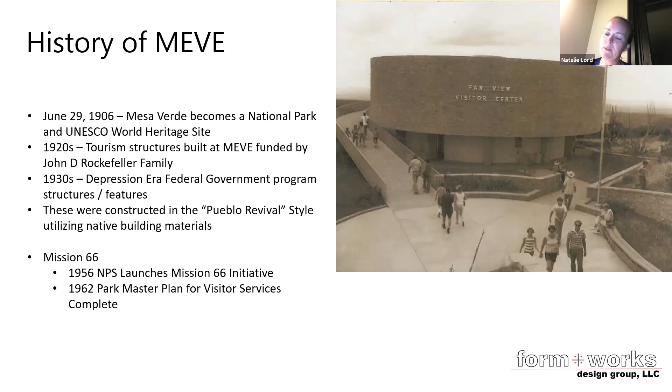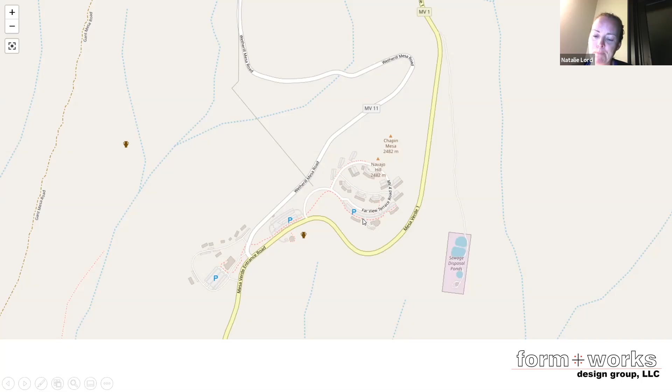So for any of you who've been down there more recently, they just built a brand new visitor center right by the front gate. But in Mission 66, they were expecting a huge amount of people to come to the parks. So they really wanted to disperse the population a little bit more. So that was the decision in putting the visitor center so far into the park. So the visitor center was designed to be closely associated with the Farview Lodge. There's a connection under the road.

Let me get to this little... It's just playing on its own.

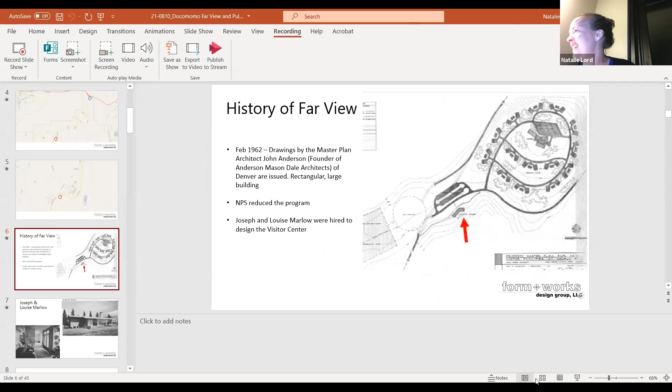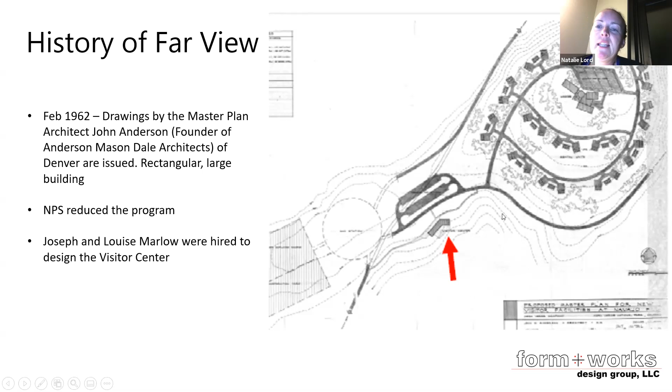So in 1962, the drawings for the master plan were originally done by John Anderson. He was the original founder of Anderson Mason Dale out of Denver. You can see that he has a large rectangular plan. And then basically the park scratched that completely and went with a plan by Joseph and Louise Marlow. The Marlows were a husband and wife team best known for their modern single-family homes in the Hilltop neighborhood.

So the Marlows worked on a design in 1962 and 63. During the design period, there was debate over what would be the use inside the building. So you can see the unique Kiva style was really what inspired the shape of the building and the experience around the site of approach. Even during construction, changes inside the building happened. They decided to scrap the idea of having an auditorium and instead have more display cases and a museum exhibit.

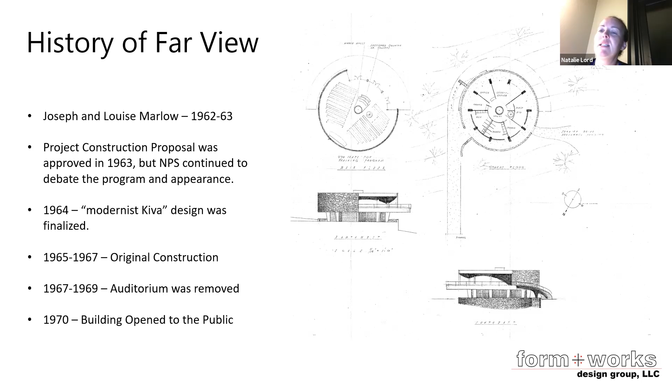So what's interesting about this is that they determined the period of significance was from 1964 to 1968, which was prior to the building even being open, but it did span this design change process that happened. So here are some of the drawings from that redesign. You can see the original larger auditorium was scrapped for a smaller one on the left. And then here's the current plan.

So the historic plan was really grainy, but this is our HSR plan that shows you can see that basically the original design is still there, which is great.

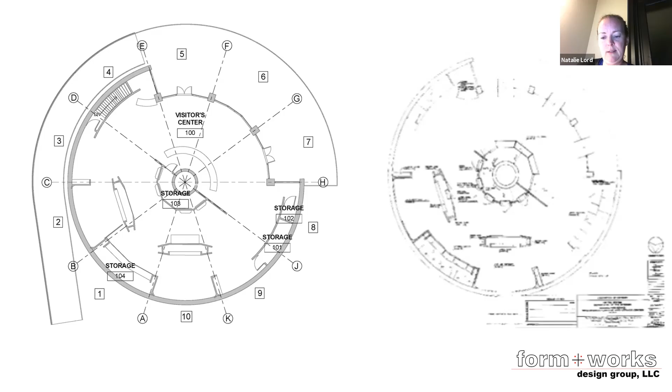So again, this was kind of a joint effort between the Park Service and History Colorado. The difference between an HSR and an HSA is they're pretty similar. It really focuses on the existing conditions. What sort of deterioration are we looking at? Cataloging the existing conditions and what changes have happened over time, which I'll get into shortly.

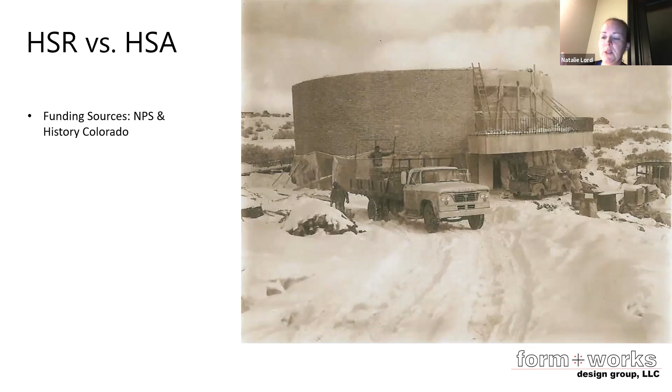We had some great historic photos during construction to work off of, and we also were able to work closely with museum staff that had a lot of records of what had been changed through time. So, obviously, the character defining features of the building included site context, including that historic approach kind of around on the ramp, the building form, the original materials, and the interior form and layout.

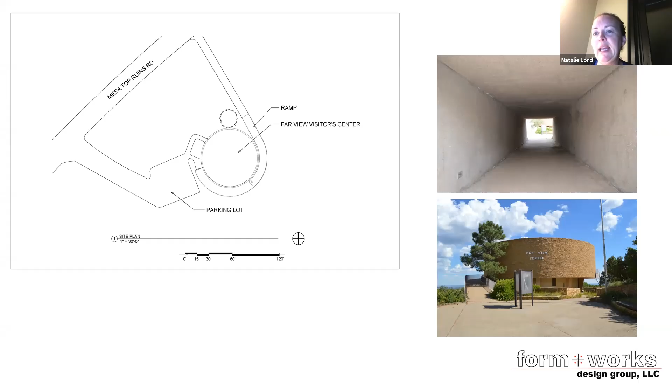So, I mentioned that you came across the site kind of under the highway through this tunnel that you can see on the upper right. And then you came out into this nice open plaza and came up the ramp and around the building. So our viewing platform is still intact, and you'll see some photos shortly that'll have some of the subtle changes that happened over time. The first floor is really interesting.

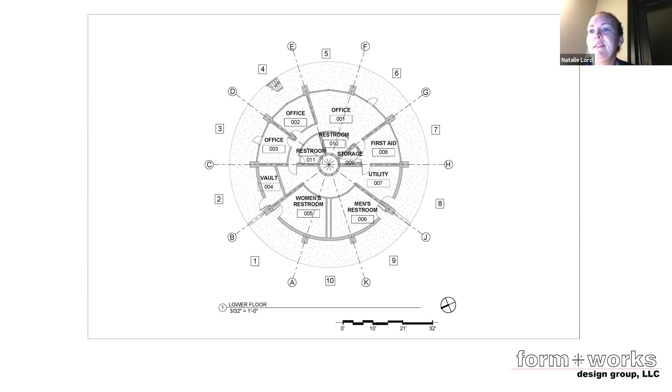It was a utilitarian use for offices, utility space, and the building is really supported by this central round column, and it cantilevers out from that. It's a reinforced concrete structure and is really unique, I think. They use that center open space to run mechanical up through the building, and then also do some really very cool beam cantilevers, which you'll see.

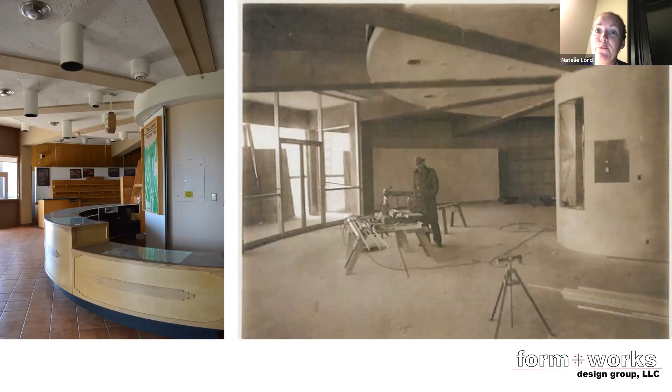Original materials at the lower level include great glazed brick, concrete floors, and original interior doors with transoms. Rehabilitation of these materials is recommended to accommodate a new use, but we decided this wasn't really a critical piece. You can see kind of the comparison of the historic photo and a current photo, that a lot of those original key features are there. I think one of the major losses, which you'll see momentarily, is that great historic storefront, which did get changed out in the 1960s.

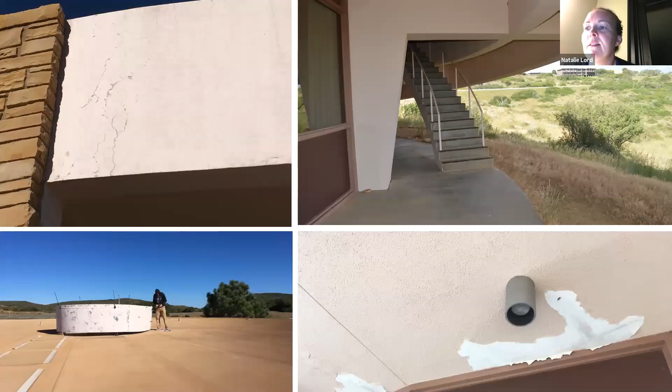So here's another close up showing that ramp from below. Really minor deterioration considering the age of this building. And then some of those penetrations that happen just with mechanical units and whatnot. You can see the chain link a little bit better. So I think one of the other elegant pieces of the building is really this lower staircase that spins around. You've got the great, you know, curving ramp, but you also have this staircase that comes down from above to the lower level.

Okay, the Pulliam Community Building is located on Cleveland Avenue, just to the south of the historic downtown. The building was basically a WPA era Works Progress Administration project, which, as many of you know, was funded through Roosevelt's campaign to get Americans back to work during the 30s. But the other part of that was that it was funded by Lillian and D.T. Pulliam. So they offered $20,000 as seed money.

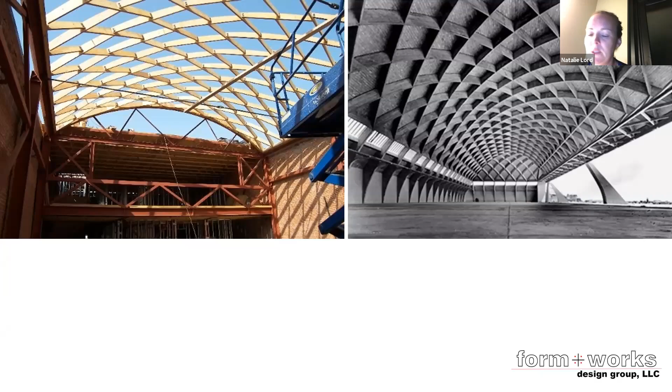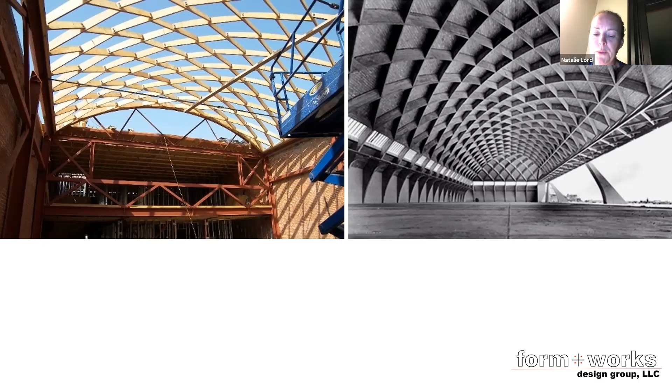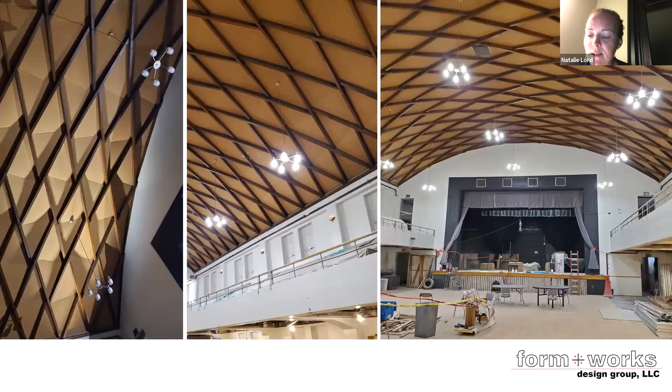At the Pulliam, a wooden sheathing covers the structure on the outside, and the lamella truss was originally patented in 1921 and became popular between the world wars, especially in Germany when metal for construction was in very short supply. So these roofs are very inexpensive, they're easy to build, and obviously very elegant. The standard wood segments are very short, making them easily mass produced, and there's no need for kind of an extensive scaffolding to construct them. You can build the pieces and sort of start spanning across the room.

So here's some current photos of the Pulliam roof. For those of you who are less familiar with the WPA, again, mentioning those simple materials, this is actually covered in just a very simple kind of a composite fiberboard. And fortunately for the Pulliam, none of this was ever painted, so we don't have to worry about stripping it. The walls are solid concrete, but in the recesses around the windows is the fiberboard. So that did get painted, but fortunately the roof did not.

Just as an anecdote, when I was in architecture school out in San Diego, our studio building had a lamella truss roof, and my professor said that there are actually very few of these structures left around the country because a lot of them were lost to fire or extensive loading. So we really feel like the Pulliam roof is probably, I don't know that it's the only one in Colorado, but it's probably one of very few. So if any of you come across one, please let me know.

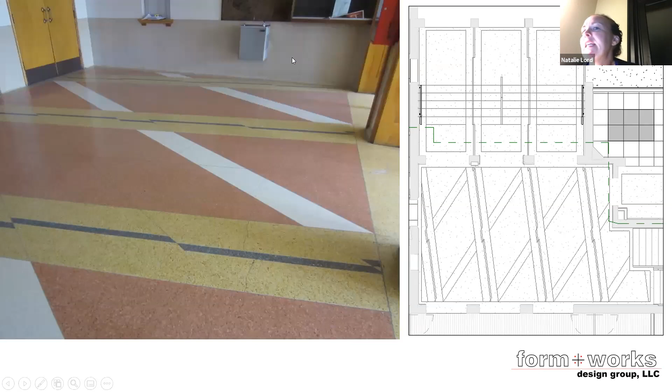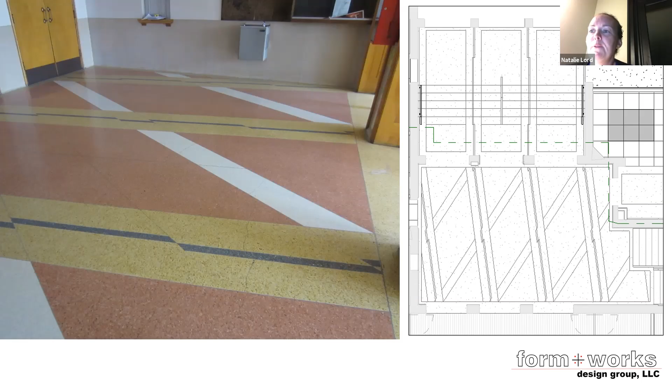So the other unique piece, again, it's a very simple building beyond some of these pieces, but the other unique piece that's very decorative is the terrazzo floors. So here's an image of the main lobby, and then I showed kind of a plan of what that actually looks like. It's kind of got this electrified look, but it also has that lamella truss pattern in the floor. So we definitely are highlighting that elsewhere.

So to talk a little bit about what's happening in the building, it's an assembly space, so A3 occupancy, a community hall, and when we did the load calculation, there was well over 1,400 occupants if it was fully loaded. And I'll talk about how we actually reduced that down, but what you're seeing up in the upper right is our current occupant load. And as you can see from this original demo plan, basically, those two egress stairs that are between column lines 9 and 10, not only were they undersized in that they were less than 36 inches, but they were very steep. They didn't comply with current codes. So trying to get 1,300 people out of the building was why the fire department basically shut it down.

While we were at it, we decided that accessibility could be done much better. So as I mentioned, there's a concrete ramp that got added onto the building, which really changes the historic facade. And the only accessible path was to this main first floor auditorium. The other kind of clunky part was this lift, which I'll show you in the main lobby.

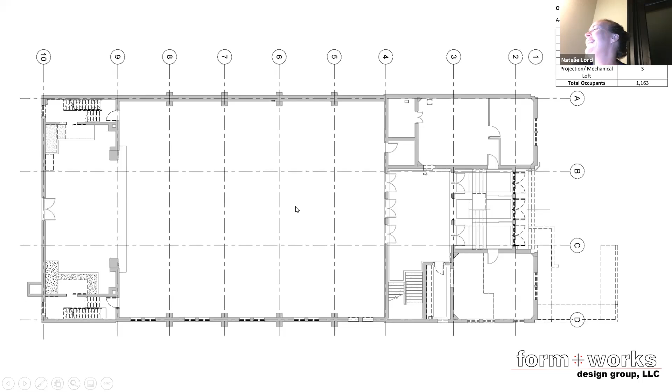The other challenge that we have with the 1936 building is that there's over 12 levels. So I tried to highlight them all. The lowest level is the boiler room, which obviously we don't need that to be accessible. But we have this lower basement level, which I'll talk about, where we're incorporating new restrooms at the basement level. And then we have the basement level. Then there's this intermediary floor, which was the green room. So these are under the stage. The main entry vestibule, which is about 3 feet off of grade,

the main floor, the stage, the second floor, and then kind of these 4 levels of the balcony. So the lowest level of the balcony aligns with the second floor, but then there's these higher levels. So great experientially if you are able to walk, but hard to get anywhere if you're in any way not able bodied. And then obviously the final floor, which is the projection room, which is very cool.

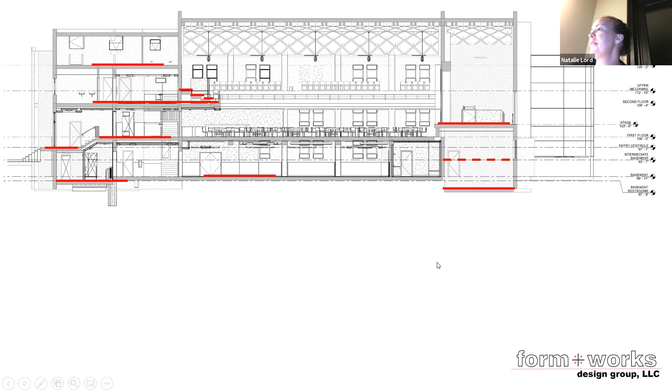So here was our solution. We decided that the main east entry was really critical historically, and we wanted to take off the ramp and change how people came in. We did some studies on where to put this elevator, how to get to as many of the levels as we possibly could. And what we came up with was we would put an elevator on the southeast portion of the building. It would be accessed from outside, come up to a new elevator lobby, which aligns with the first floor.

So the levels here between column lines 1 and 3 are at that lower vestibule level. And these were historically just office space. So what we decided to do is that we would basically make these storage or the admin offices for anybody for the theater, that basically that level could not be fully accessed, which was kind of our compromise.

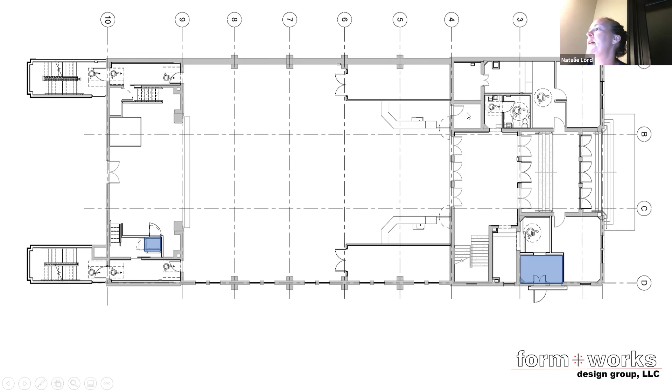But you come in, you're able to get to the first floor. There's the ticket booth here. We added an accessible restroom so that you don't need to take the elevator to the basement or to the second floor to get to an accessible restroom.

And as I mentioned, we had to reduce down the occupancy even more, just so that these back stair towers didn't have to be over 5 feet wide, which would then trigger us to have a center railing down the middle of the stair. So that was basically our driving force, was how to make it so we didn't have to have center railing in the stair towers.

So we took out the stairs that were between 9 and 10 and added landings. But that cut off the green room level, and basically we had to scrap the green rooms at their current level as more storage kind of utility space. So it's a little bit strange, but this is how we dealt with 12 levels in a historic building.

We did decide that we were going to bring accessibility to the stage so that if it was used, the Pulliam is really used for a lot of different things. And we not only wanted to make sure that we responded to the fire department and safety concerns, but we really wanted to listen to how the community wanted to use the building.

So we talked to not only music and arts and venues folks, but we also met with people who have rented the Pulliam in the past for graduations, for square dancing, for all the plethora of uses. So we did want to make sure that for graduation, somebody could get to the stage easily without having to have a portable lift that would come into the building. So blue shows you our vertical accessibility, and red is our bathroom accessibility.

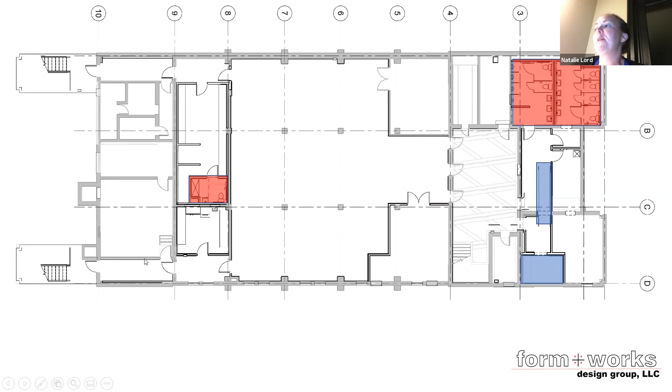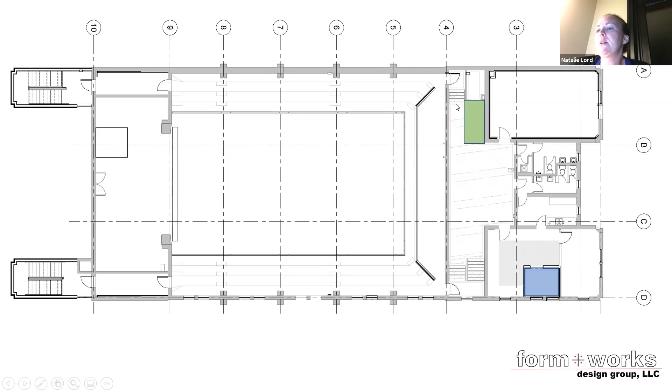And here we are up at the second floor and the balcony level. So the elevator comes up to a nice second floor lobby space. And the future plan is to put a lift or ramp somewhere in this area to get up to our mezzanine level. This is going to be basically an infill, but not in a way that couldn't be reversed. So it'll be framed in wood framing over those concrete risers at the balcony level. They wanted to do this not only for a sound booth area, but also to have an accessible platform so people could observe from this upper floor.

There's this really great, unfortunately, a lot of it has to be restored, but a great boardroom up here. So this will be accessible again. And the historic bathrooms up here, which have 6-foot high terrazzo wainscot, will be kept as is. So how the current code is written, you can basically be within one level of an accessible restroom. And we decided these second floor ones were really special, so we wanted to save them as is.

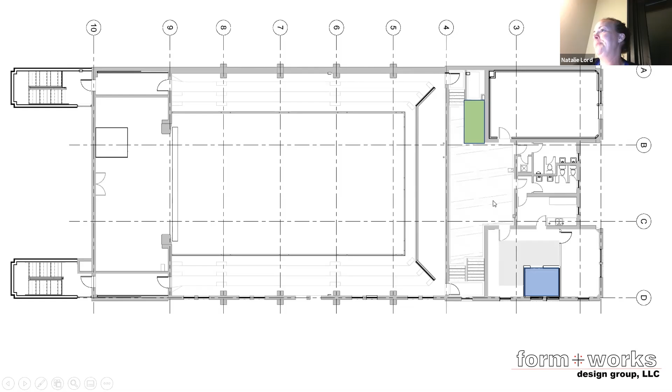So here is where the Pulliam is to date. As I mentioned, we're about to hopefully start phase 3. Phase 1 was building the south stair tower, which is this one. And then phase 2 was to build the north stair tower. And you can see we really tried to do an homage to the Art Deco style, but differentiate the addition from the historic. We also put the vertical windows between to really give some relief between the historic wall and the new addition.

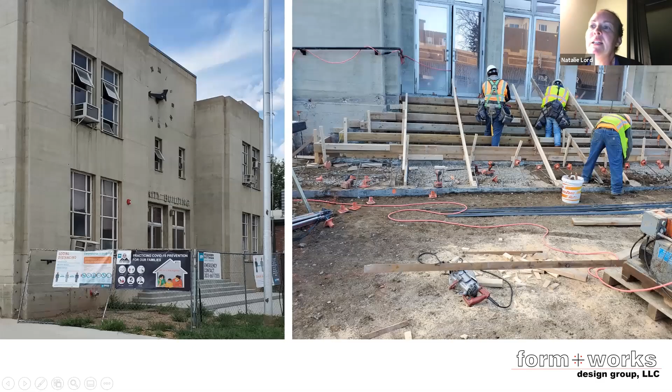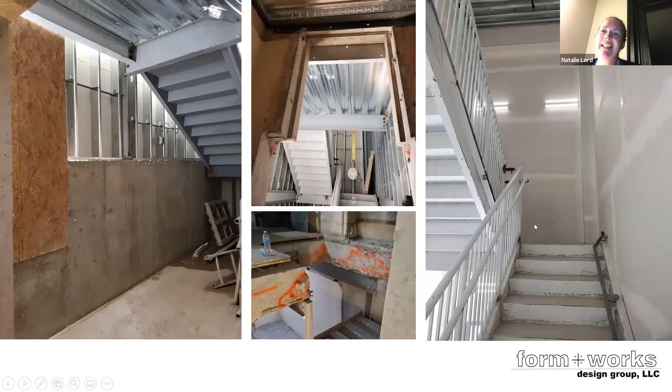So here's a photo of what the building looks like after the ramp was removed. Still in a little bit of rough shape, so we're going to have to do some rehabilitation of the concrete here. And unfortunately, we were hoping that we could just take off the ramp and the stair would be intact. But that was not to be, so we had to recreate the historic grand stair. This is them forming it. Like I said, this is quite a challenge as far as all the saw cutting that needed to happen.

This is a view inside one of the new stair towers, and the center photo on the bottom is us cutting through the stage structure and reconnecting down into that green room space that got cut off basically when the historic stair towers were removed. This is an old window that got enlarged, so the door opening is now here below it. And this all got infilled with new board form concrete.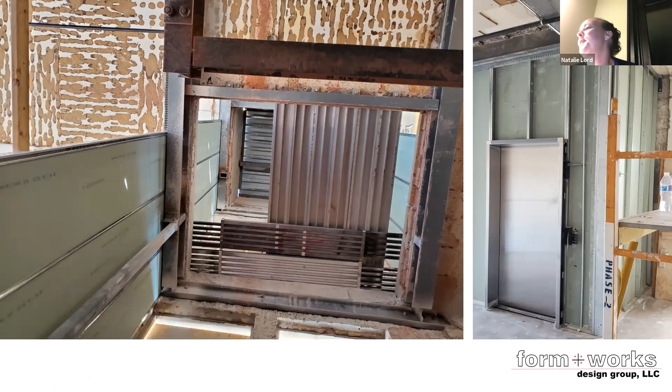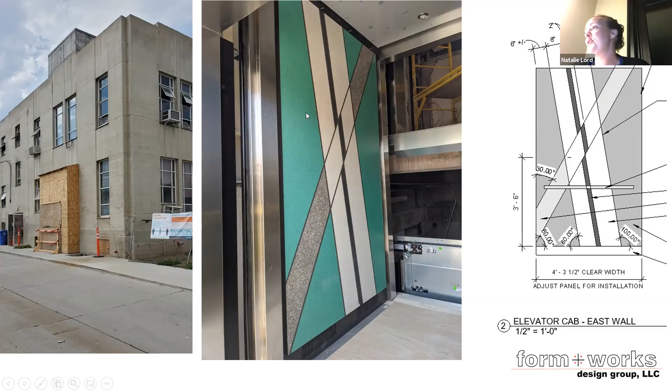The other fun part of the project was putting a new elevator shaft through all 4 of those stories. I always love taking elevator shaft photos. And then one of our design features was to sort of highlight that design from the terrazzo in the elevator cab. So this is our little elevator overrun shaft, which we tried to blend as well as we could, while differentiating it from the historic piece.

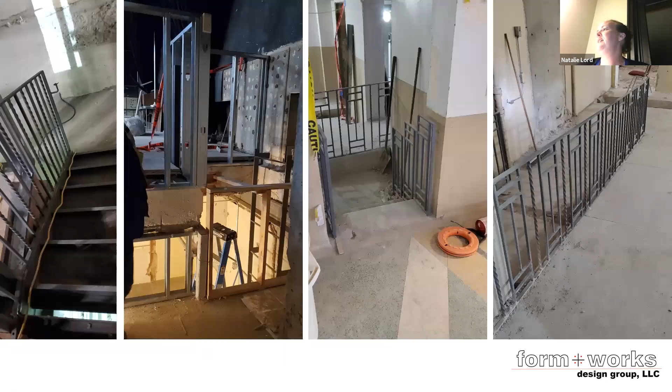And here's some more photos. Obviously all the new railings are slightly different in that they meet current code. So the spacing of the spindles is obviously much closer and the heights of the railings are higher, but we really wanted to mimic the patterns that were part of the Pulliam because we wanted to make sure that they would all fit. So this image is the stage, basically. Here's the new wall and then the new lower level as we're coming up. And some railings. This is the ramp down to the basement level.

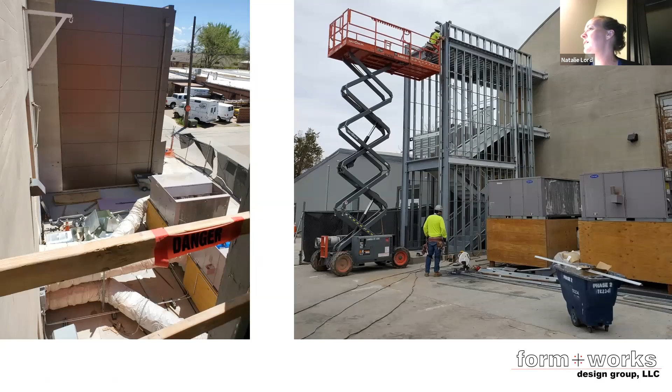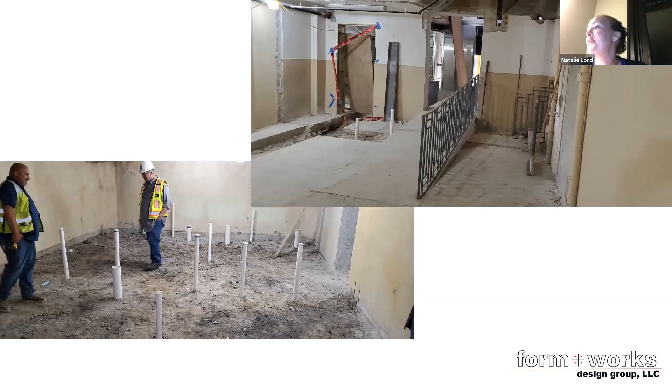More fun views during construction of what we call our rooftop units. They're terribly not attractive. Again, one of the major challenges was providing plumbing, life safety for fire sprinkler and fire alarm. This is our new underground plumbing for the future bathrooms, which will hopefully be going in, and the ramp that connects that basement level elevator lobby down to the new bathroom. So there will be a wall here separating out the men's and the women's room.

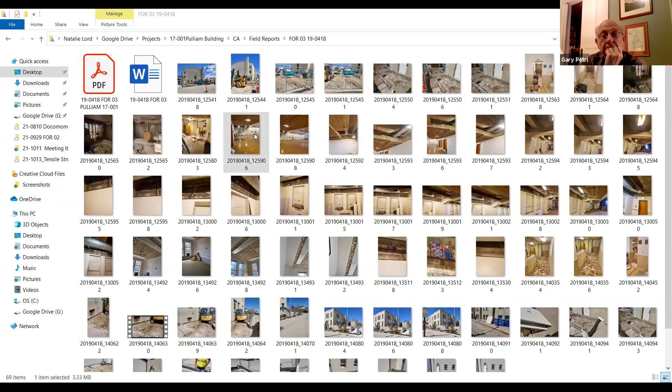And if any of you don't know any of the Marlows' other buildings, there are a couple of their commercial buildings on Littleton Boulevard, if anyone is curious. There's several of their houses in Hilltop. And there's a couple of their houses down here and one in Golden too, that we discussed a while ago. Yes. And their own house is on the corner of 12th and Oneida, opposite Montclair Park. Didn't they have one in Littleton too that they lived in for a while? They did a house in Littleton for Simon Hertzstein, which is now a museum. Yep, that's the Littleton Museum. I thought they had another house though in Littleton. I don't know. I knew them very well.

I'd love to pick your brain on them a little bit more. You make that one out? Interesting. I think I have a better one that shows the name of the installation.

One of the Marlows' houses is a Denver landmark now, the Joshua House. Mm-hmm. That's a very pretty house, and I'm glad that one got landmarked. I really wish the owners of the building, I can't remember if it's an architecture firm right now, the one that used to be a title company on the south side of Littleton Boulevard, with that great mural, I wish they would landmark that one, but the owners are kind of grumpy. They've taken good care of it, but they don't want to landmark it.

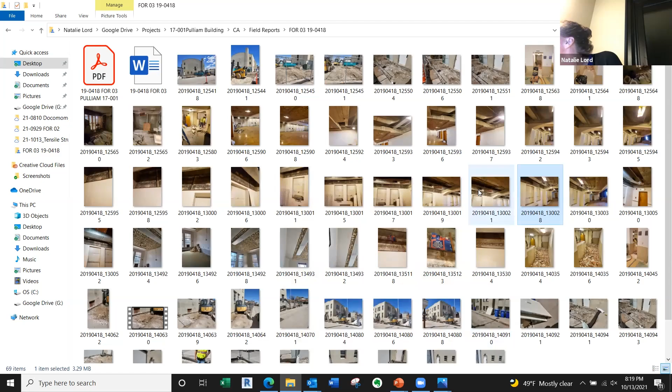I think the board form concrete is just one of the pieces of the Pulliam that makes it extra special in my mind. So you will see a lot of this once it's all done. And we've got some new lighting designs that'll basically highlight upwards as part of that, providing enough light for egress at the floor level. If there's an event happening, you've got to make sure people can still get out. So those lights will actually be hidden up here, but also provide the added benefit of lighting up the upper areas.

And I have a meeting in a couple weeks with the city of Loveland, so I will talk to them about doing a tour. That would be really cool. That'd be really cool. And I'm sure you guys won't mind if it's in a state of mid-construction. I think it's pretty cool. We got to see the Air Force Academy that way, and it's neat to see the structure of the building. Yeah.

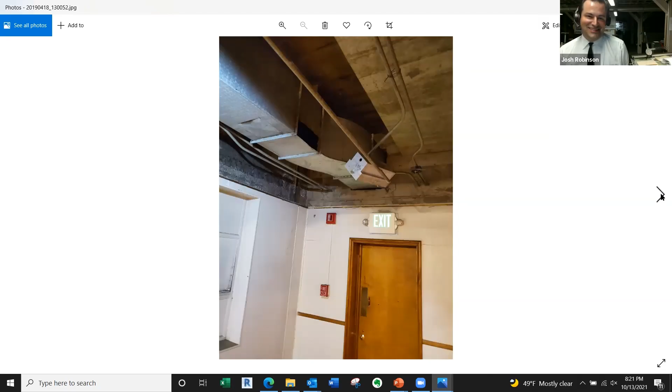God, can you imagine doing an entire building board form? And then you cover it up, because it's just how you build. Like, my God. So some of the other fun detailing that also got covered up by drop ceilings, which we're bringing back. So this is, again, just that pressed fiberboard, really inexpensive material, but you can see that 3-step of the Art Deco and curved edges. So just some cool, simple, inexpensive, but neat details that they did back then.

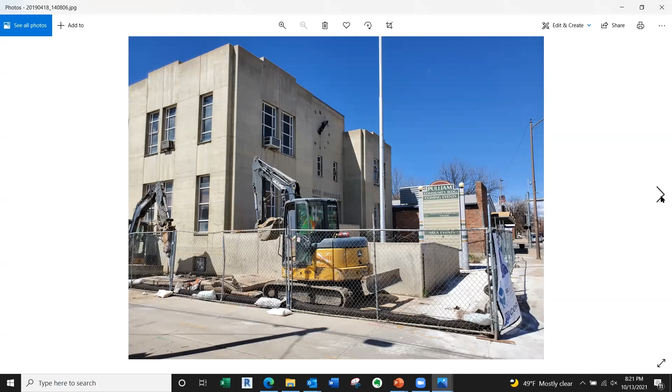Hey, Ron, this is Nan. Are you familiar with beaver board? Yeah, I know of it. Okay. I just wonder how extensively it was used, because that's what that stuff looks like to me. Yeah, I don't know how extensively it was used, but it's fair to say I've never done a project that had it on it. Really? Interesting. Yeah. But a lot of my stuff tends to be older than when we would have had beaver board. Right.

Well, thank you all. Well, Natalie, I'm going to be real. Where'd your picture go? Oh. I'm going to be real political here, and I'm going to ask, so what kind of projects do you like working on the most?

A variety of all different age complexities. Pulliam has been really unique just because, how do you get accessibility and egress out of all those levels? And at some point you do have to make some compromises. So that one was probably one of the... I've really been so fortunate, knock on wood. I always think, don't say anything like that, you're gonna get struck by lightning or something.